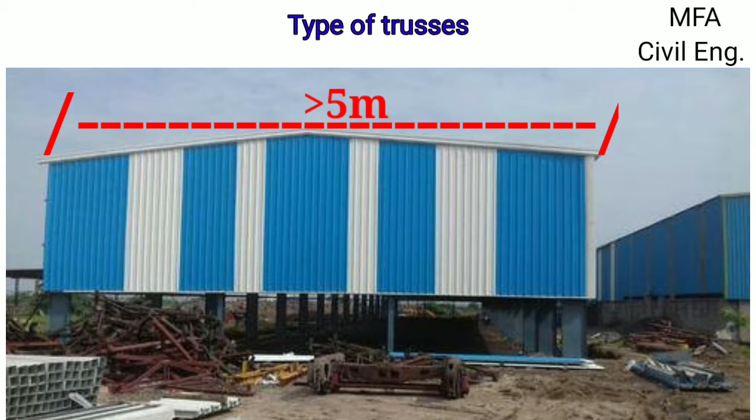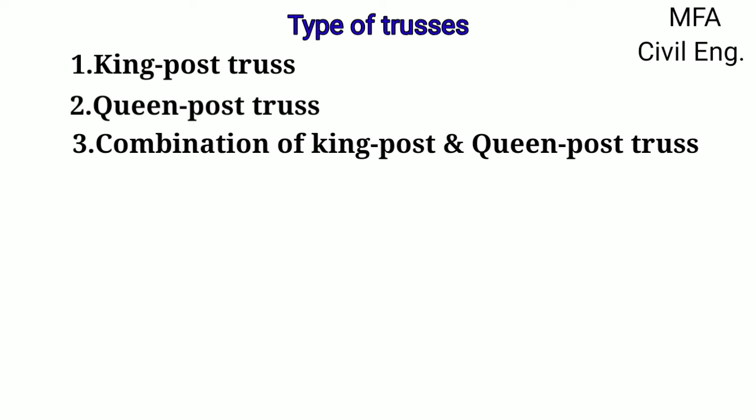When the span of the pitch roof or sloping roof is more than 5 meters, truss roofs are more suitable. Truss roofs basically consist of a truss. There are various types of trusses used in the pitch roof or sloping roof, like king post truss, queen post truss, truss made by the combination of king post and queen post truss, steel truss, bow string truss or Belfast roof truss, mansard truss, truncated truss, and composite truss.

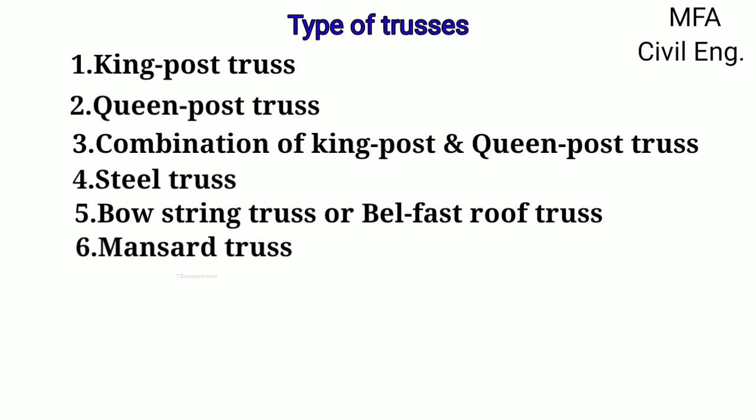The components of the king post truss are the tie beam, two principal rafters, two struts, and a king post. These members are sawn and made smooth and plain by the jack plane, and desired joints are made for the purpose of connecting the components.

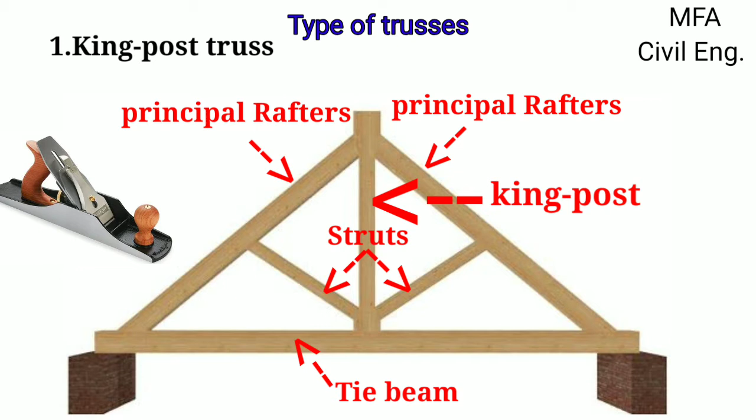The principal rafter is joined to the tie beam by a bridle joint or by a tenon joint. These joints are fastened and strengthened by iron straps.

Two struts are fixed to the principal rafter by an oblique mortise and tenon joint. Then the king post is fixed into the upper edge of the tie beam by a tenon joint.

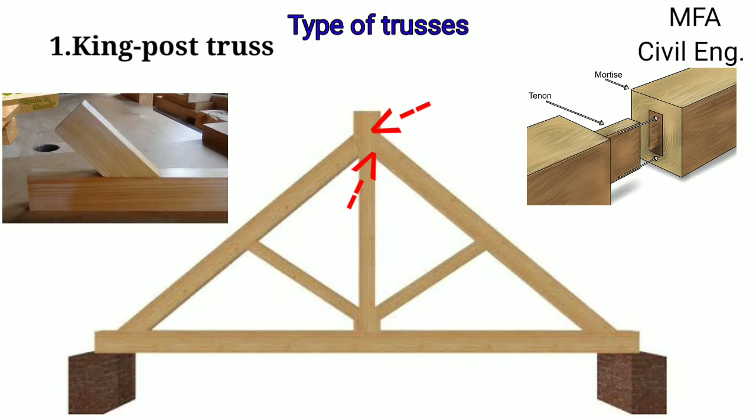The head of the king post is joined to the end of the principal rafter by a mortise and tenon joint. These joints are further fixed tightly with the help of a three-way mild steel strap on each side. Purlins are placed at right angles to the principal rafter and joined through a gauge joint and cleat.

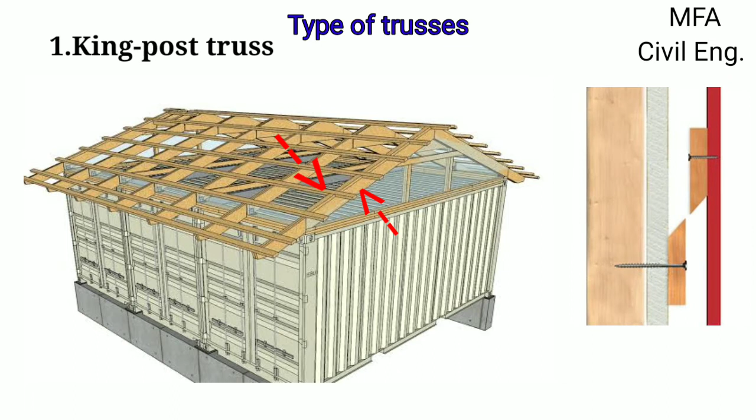In the king post truss, there is only one vertical post, but in the case of the queen post truss, there are two vertical posts termed as queen posts. A horizontal beam connected at the top of the queen posts is termed as the straining beam.

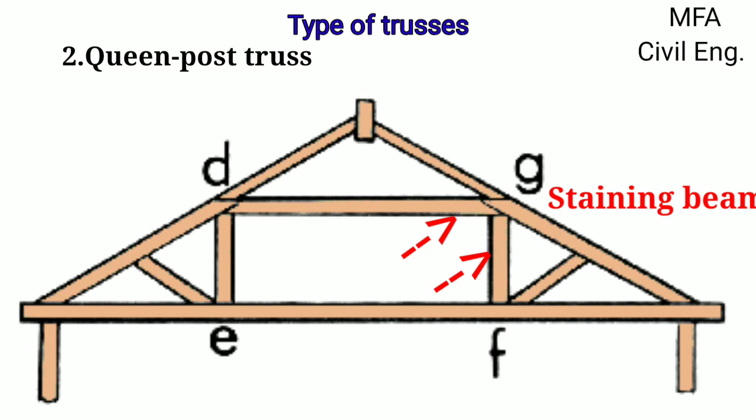Each queen post and principal rafter are connected by two inclined members called struts. The struts are subjected to compression, therefore they are compression members, whereas the queen posts are subjected to tension, therefore they are called tension members.

The purpose of providing the straining beam is to keep the junction in a stable condition. Also, a straining sill is joined to the tie beam between the portion of the queen posts so as to counteract the load coming from the struts. Purlins are provided along the cleat.

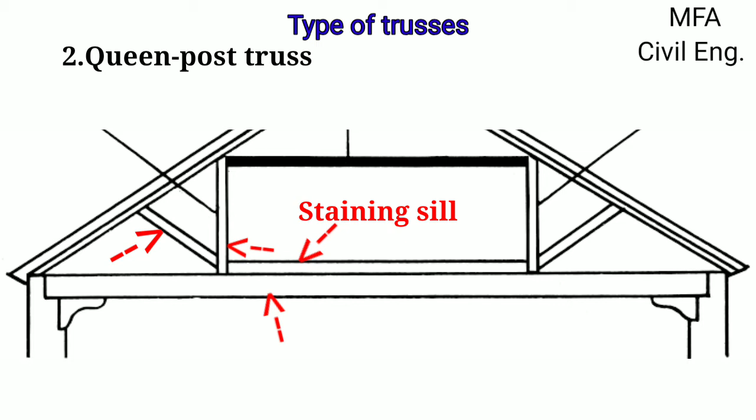Queen post trusses are most suitable for spans ranging from 8 meters to 12 meters. The principal rafter and the straining beam are joined at the head of the queen post. The joint made by these three members - the principal rafter, straining beam, and queen post - is connected by a three-way metal strap and bolt on each face of the joint.

The lower end of the queen post is made wide so as to receive the tenon of the strut. Then these four members - the lower end of the queen post, struts, straining sills, and tie beams - form a joint which is further connected by a strapped metal strip and bolts.

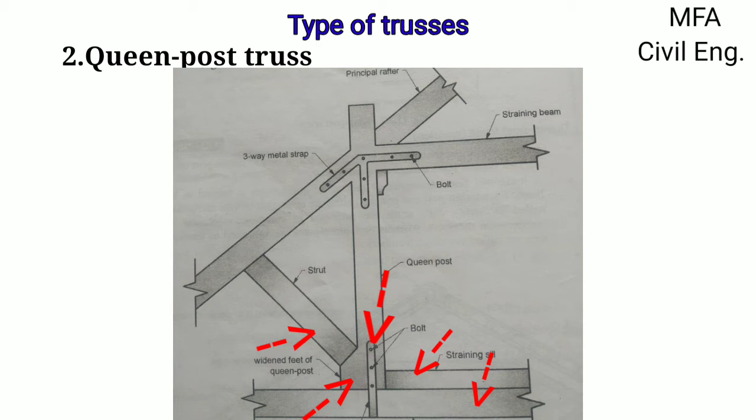For spans up to 18 meters, it is more suitable to use a truss made by the combination of a king post truss and a queen post truss.

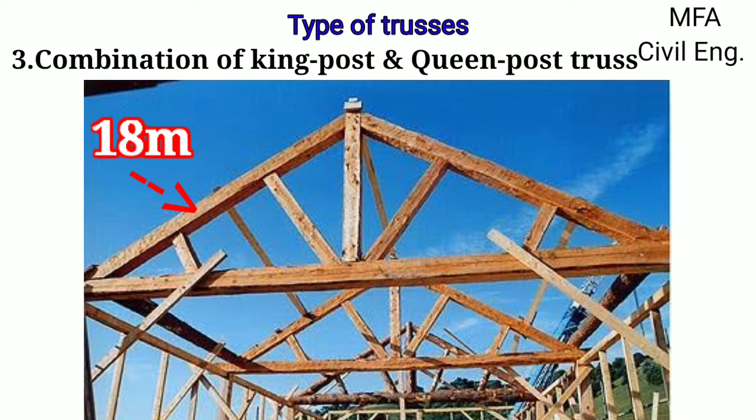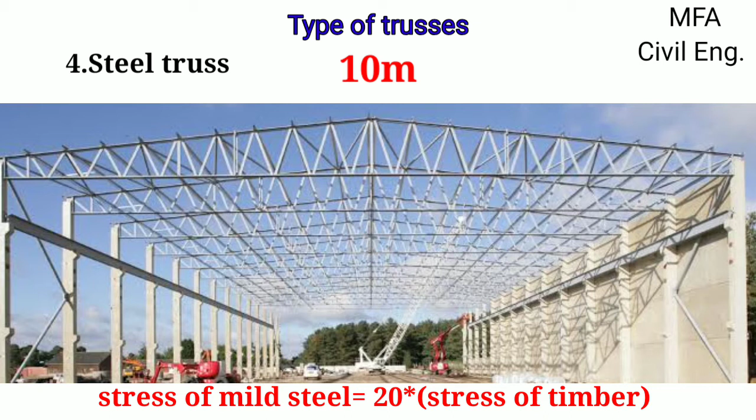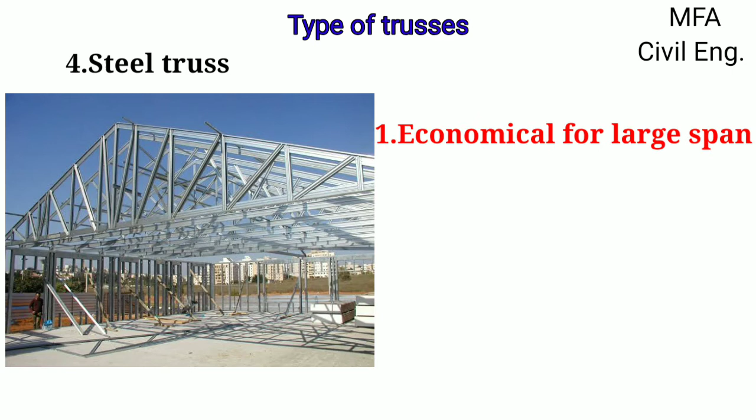When the span is more than 10 meters, timber trusses become heavy and uneconomical. The use of mild steel trusses proves to be economical for large spans. The safe working stress on mild steel is about 20 times that of ordinary structural timber in direct tension. Steel trusses have various advantages over timber, like being economical for large spans.

Steel trusses are light in weight and can be fabricated in different shapes and sizes as per the requirement. These trusses are fireproof and free from the attack of white ants. They are stronger than timber trusses.

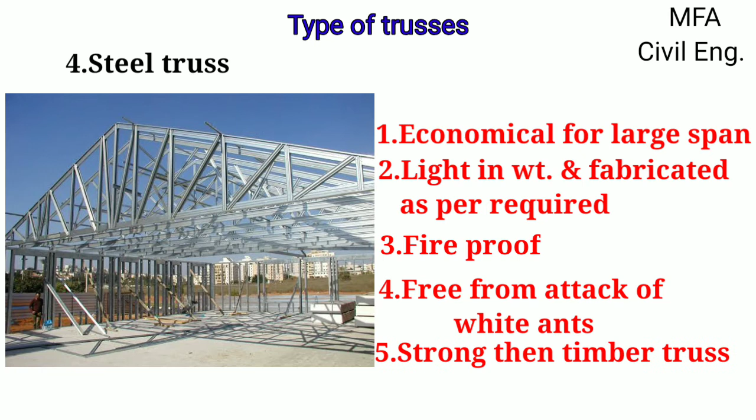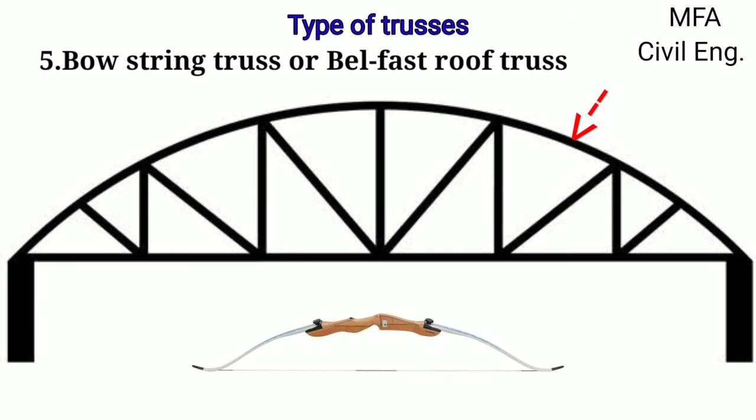The shape of the bow string truss or Belfast roof truss is like a bow. It consists of a thin section of timber with its top portion curved, and a light roof covering material. This type of truss can be suitable up to a 30 meter span.

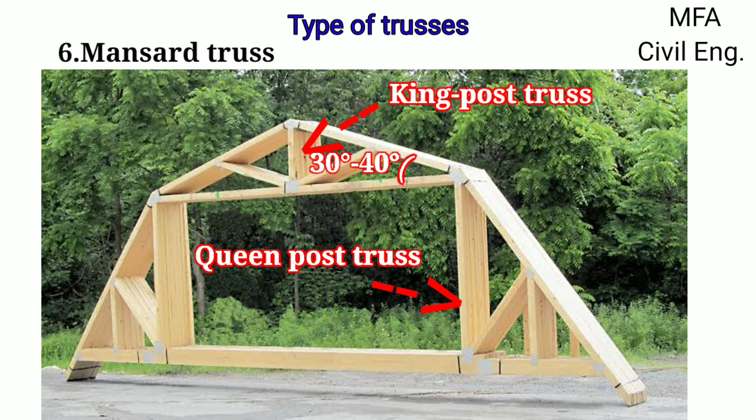When steel trusses are launched, there is very rare use of the mansard roof truss. It consists of two pitches - one is a king post truss on the upper side varying from 30 to 40 degrees, and the other is a queen post truss on the lower side varying from 60 to 70 degrees.

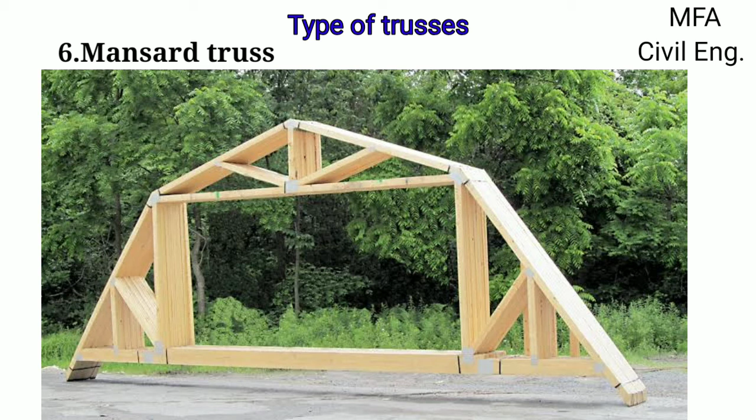In this truss, there is more or less use of the combination of a king post on the upper side and a queen post truss on the lower side. Therefore, it is called a two-story truss. It proves economical in space and cost. Since this type of truss has an odd shape, its use has become obsolete nowadays.

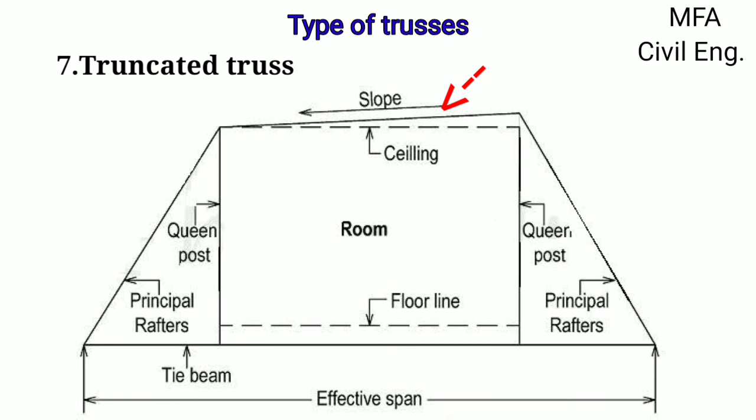The truncated roof is similar to the mansard roof truss, but its top is made flat with a mild slope on one side. It is more suitable when it is required to have a room within the roof itself, between two queen posts.

When the roof truss is made up of two materials like timber and steel, then it is said to be a composite roof truss.

The members in the case of trusses are subjected to tension and compression. Therefore, tension members are made up of steel and compression members are made up of timber. If the tension member is made up of timber, then the timber section becomes heavy, therefore it is essential to make it in steel.

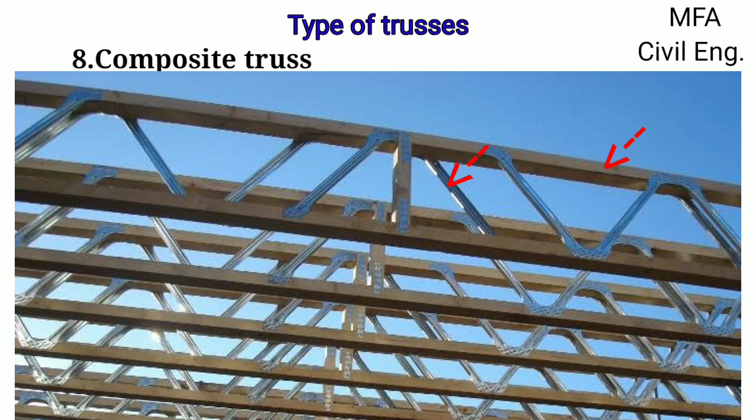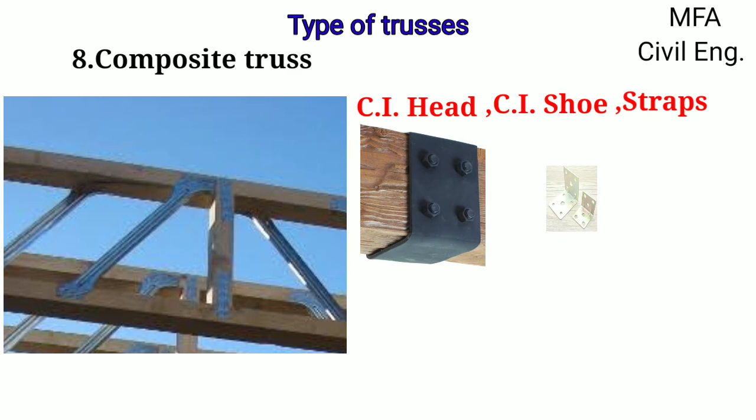At the junction of a steel and timber member, special fittings such as cast iron heads, cast iron shoes, straps, steel angles, bolts, and king bolts are made.